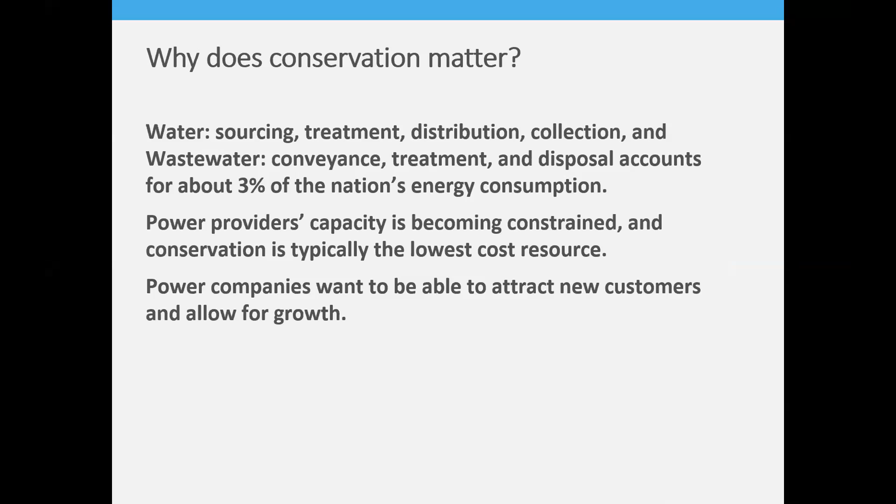Why should we care about conservation? Well, water sourcing, treatment, distribution, collection, and wastewater conveyance, treatment, and disposal accounts for about 3% of our nation's energy consumption. We've got power providers where their capacity is becoming constrained, and conservation is typically the lowest cost resource. And then power companies also want to be able to attract new customers and allow for growth.

So nationally, the energy used by municipal water and wastewater treatment plants typically accounts for 35% of a municipality's energy budget. So it's a significant cost. And wastewater treatment plants generally are large energy consumers with pumps and motors and equipment that's running all the time.

So just to give you a sense of scale, if you've got a 10 horsepower motor that's running all year, all the time, it's going to use 65,000 kilowatt hours in a year. If it's a 2 horsepower motor, it's going to use 13,000 kilowatt hours a year. If you've got a 5 kilowatt space heater and that's running 10 hours a day, 5 days a week, it's going to use about 11,000 kilowatt hours, which is very similar to that 2 horsepower pump. A 60 watt light bulb is going to use 526 kilowatt hours a year.

So why should you care? Well, regionally, electric rates are heading up, and the electrical costs associated with pumping and treatment are often the highest non-labor cost for a municipality. And it's one of the few costs that can actually be reduced without impacting water quality. So if we just look at pumps, the operation and maintenance cost over the lifetime is actually 70 to 80%. So only 20 to 30% of that cost is capital.

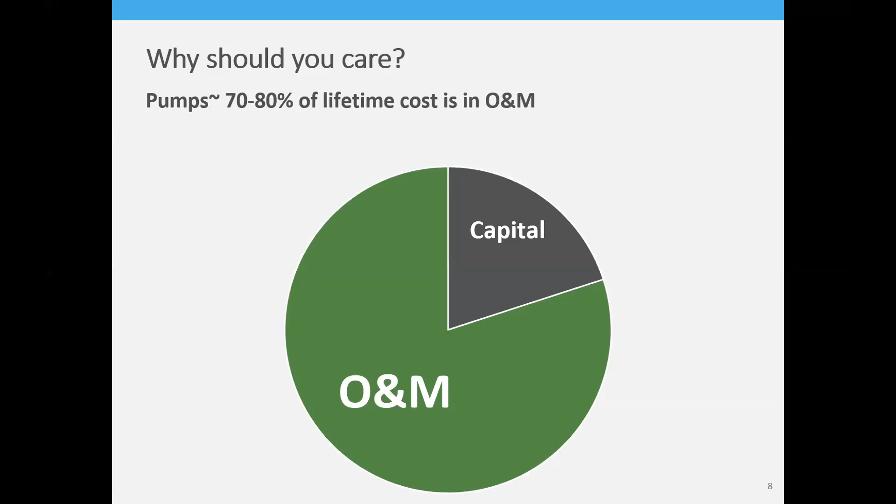And now premium efficient motors are the minimum standard for new equipment in the US. But for some cases, there's also super premium motors that have even higher efficiency. And if you choose to use those, there could be an incentive for that. And the lifetime cost of most equipment is incredibly dependent on its efficiency. So efficiency is really important to consider.

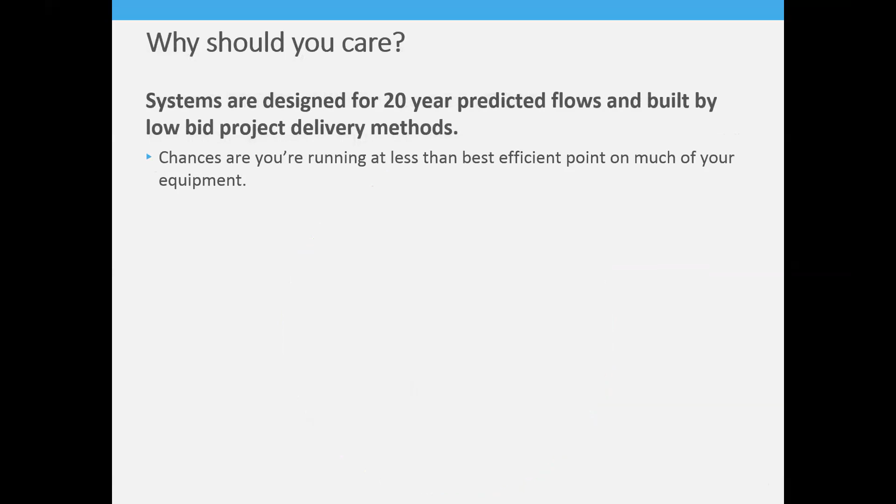So typically systems are designed for 20 years predicted flows and then built with low bid project delivery methods. So the chances are you're running at less than your best efficiency point on most of your equipment. And so sometimes that means your equipment's working harder than it needs to. And now SRF grants and loans have green requirements, so energy projects can qualify.

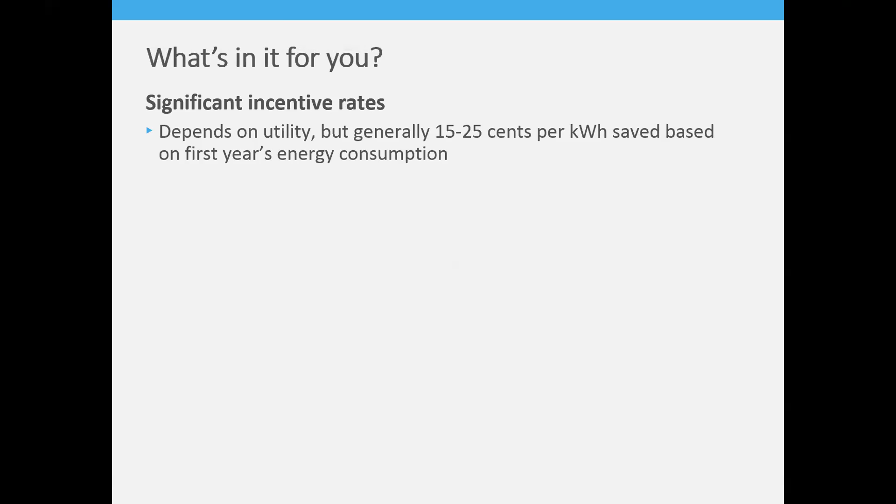What's in it for you is a significant incentive rate. So depending on your utility, it can be anywhere from 15 to 25 cents per kilowatt hour saved based on your first year's energy consumption and savings. So if you have an aeration system and you can go from 25 horsepower down to 15 horsepower, you could be looking at $12,000 to $16,000.

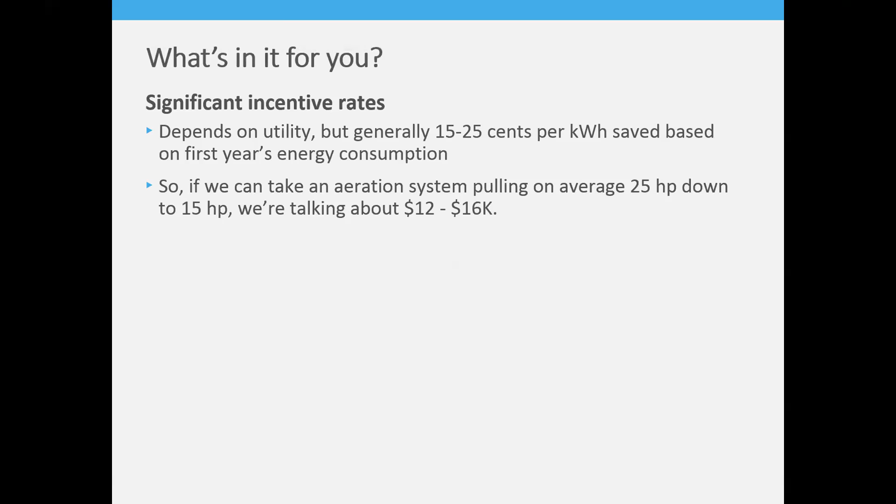And there's normally a lot of free assistance in identifying potential projects, shepherding the projects through the system, and performing measurement and verification on what you installed. And then you're going to get that ongoing energy savings for the life of your equipment. And sometimes you get reduced maintenance costs because you're turning off equipment or turning it down. And then sometimes there's aesthetic and comfort improvements. So better lighting might be more safe, better HVAC, more comfortable.

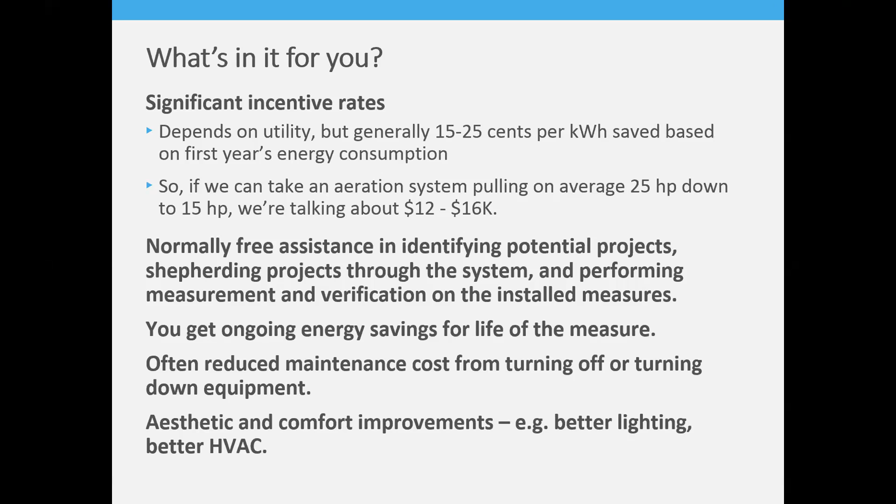You may be thinking, who do I call? Well, this is a view of utilities in the Bonneville Power Administration service territory. Bonneville Power Administration is a federal power marketing agency. They're under the Department of Energy, and they've been around since 1937. Their service area covers Idaho, Oregon, Washington, Western Montana, and then portions of California, Nevada, Utah, and Wyoming.

And BPA has the Energy Smart Industrial Program, which helps their customers and their industrial end users achieve cost-effective energy savings. They have technical expertise and a lot of resources. And then there's Energy Trust of Oregon, which is based in the Portland area, and they help customers in Oregon. Energy Trust, BPA, Idaho Power, Rocky Mountain Power, Avista, any of those providers has very similar programs and incentives.

So I'm going to kind of focus on explaining BPA and then give a little bit of information about the other providers, but they do have similar programs. So Energy Trust of Oregon serves customers of Portland General Electric, Pacific Power, Northwest Natural, and Cascade Natural Gas.

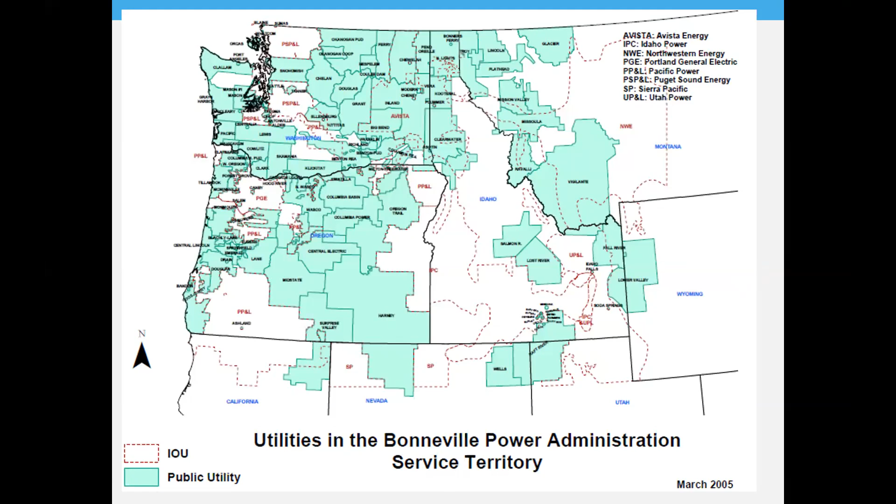But Energy Smart Industrial Program components have an Energy Smart Industrial Partner, that's the face of the program. And what we're really here to talk about today is the custom projects. That's your traditional capital projects. So we're looking for incentives for pumps, fans, compressed air, motors, variable frequency drives, control upgrades, and process upgrades.

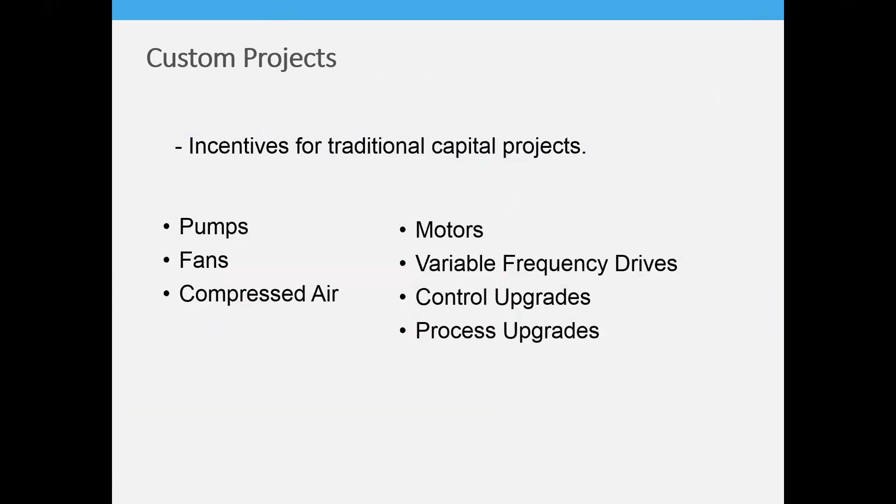As I mentioned, the incentives typically vary from 15 cents to 25 cents per kilowatt hour. And then there's also a cap at 50, depending on who you're served by, 50 to 70% of the project cost. So you're going to get the lesser of either the rate-based incentive or the 50 to 70% of the project cost. The project cost can include design fees, and it can be the incremental cost between baseline and the efficient equipment for new construction.

So let's say you're putting in new aeration basins. It's not going to be the cost of the concrete and every cost associated with all the new basins. If you're putting in turbo blowers, but you could have put in centrifugal blowers that were much less efficient and you're using DO control, the cost difference is going to be the turbo blower cost minus the centrifugal blower cost.

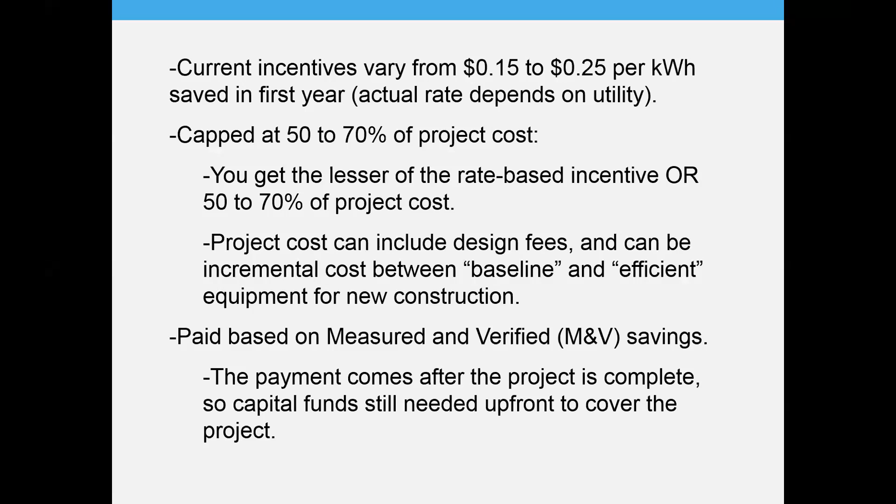And then it's paid based on the M&V savings, so you do have to pay up front. The payment's going to come after your project's complete and the savings have been verified. So you still need your capital funds up front.

So just to estimate payback, because the utilities are also going to look at payback when they do the incentives. If it's got a 50-year payback, that's not going to be considered cost effective from the power provider's perspective. So let's say you're going to have savings of 100,000 kilowatt hours, and for your provider, let's say you're charged 5 cents a kilowatt hour. So that savings, you're going to save $5,000 a year from that project. And let's say your project costs $50,000. Well, then that's a 10-year payback, 50,000 divided by 5,000.

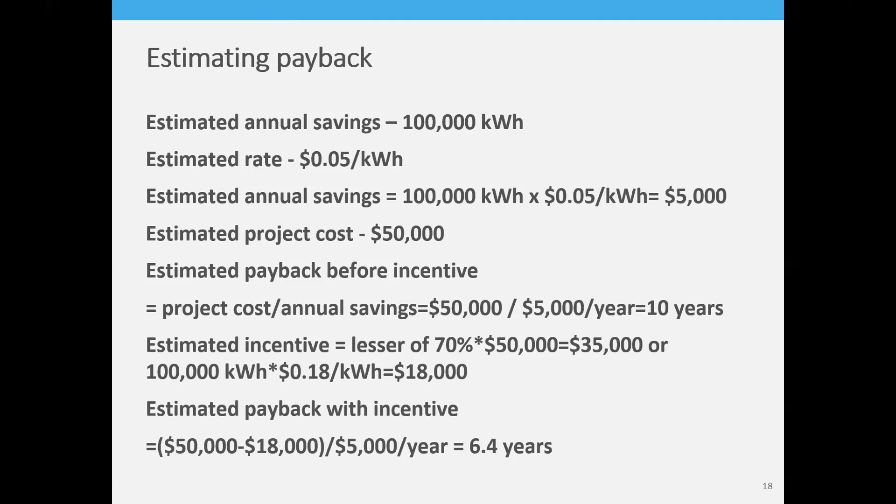So let's say that you're in Idaho Power's area and you're going to get 70% of project cost or 18 cents per kilowatt hour, whichever's less. At 70%, that would be $35,000 incentive, but you're only saving 100,000 kilowatt hours, which is $18,000. So you're going to get an $18,000 incentive. So your cost is going to be 50,000 minus 18,000 divided by the $5,000 a year. So you're going to go from a 10-year payback without your incentive down to a 6.4 year payback with the incentive you're going to get.

Another program component is small industrial, and it's kind of trade ally driven. Small industrial means small industrial projects, not that your facility is small, just that the particular project you're doing is smaller. An example would be a small 75 horsepower or less compressed air system.

This uses simplified analysis tools, and there's a rapid review and approval process, using vendors to help bring in projects. The incentive rate is the same as the custom projects incentive. There's not really M&V, just making sure that the controls are tuned to what they were for the calculations and that the equipment was installed.

So ESI has a small industrial program. Other programs have similar components that are just called something different, maybe streamlined industrial. Things are called different things depending on who provides your power, but you're going to find similar programs.

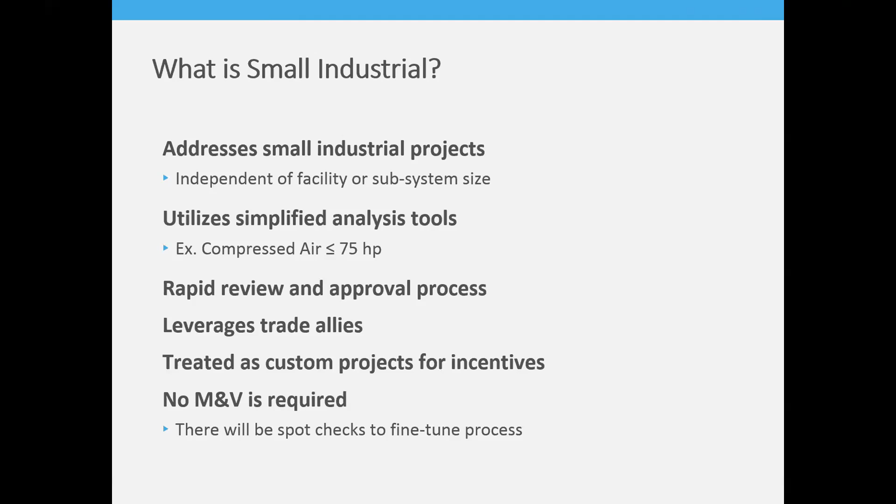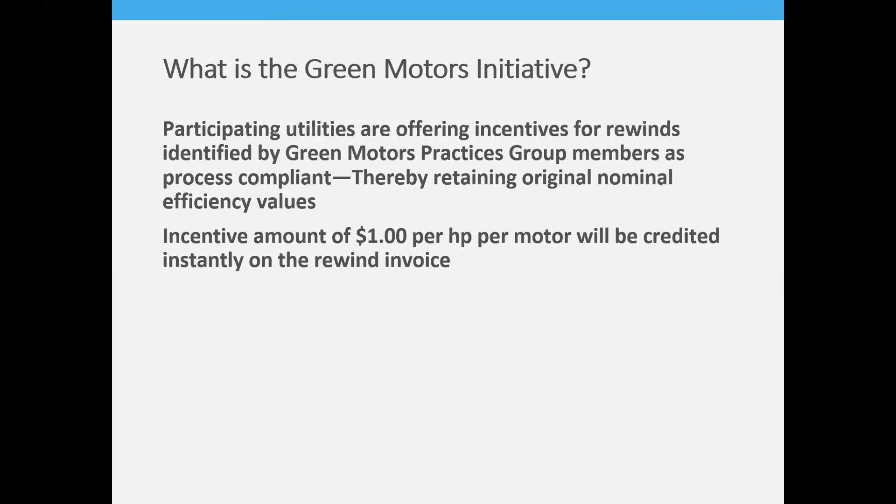I just wanted to mention the Green Motors initiative that the utilities participate in. Basically, if you take your motor to be rewound, and they do the green motors process, it's going to retain the original nominal efficiency value. The incentive's $1 per horsepower, and that's going to be credited on your invoice. Greenmotors.org has the shops, and you can save up to 40% or more of the cost of buying a new motor, while knowing that you're getting that same efficiency it originally had.

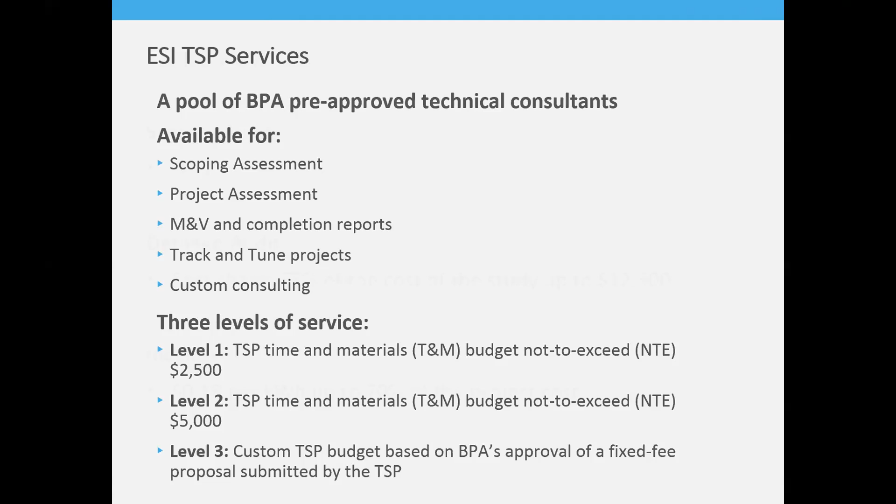So the ESI program has technical service proposal consultants, a pool of BPA pre-approved technical consultants that can help you with scoping assessments, project assessments, M&V and completion reports, track and tune projects, and custom consulting. Three levels of service are: level 1 would be time and materials up to $2,500, level 2 up to $5,000, and level 3 is custom based on an approved proposal.

To compare that to Idaho Power, they have scoping audits with pre-approved companies that can do that. Cascade Energy is one of those. That's free to the customers up to a $3,500 value. That would help you identify a project if you don't really have anything in mind, or if you do have something in mind and just need help coming up with your energy savings.

Idaho Power will also do a cost share for a detailed audit, which is a deeper dive that really digs into a project and comes up with all the estimated energy savings for different equipment going in. You as a customer would pay for that, and then Idaho Power would reimburse you up to 75% of the cost of the study, up to $12,500. Their incentive is 18 cents per kilowatt hour, up to 70% of the project cost.

Energy Trust of Oregon does scoping studies for free for their customers, conducted by program delivery contractors. So your facility has a program delivery contractor if you're served by Energy Trust of Oregon for your energy efficiency. They also do technical energy studies for free, and their incentive is 25 cents per kilowatt hour, up to 50% of project cost. Rocky Mountain Power is 15 cents per kilowatt hour, up to 70% of project costs.

Looking at retrofit opportunities, sometimes they can be a challenge because of that design for 20 years of growth, the difference between capital costs and O&M costs, and sometimes there can be regulatory challenges because you really need to meet your permit, with little to no tolerance for errors if you're experimenting.

Energy costs are typically considered fixed with a slight adjustment each year for inflation, and we have relatively low power costs, some of the lowest costs in the nation. Really the goal is to produce clean water that's meeting permit.

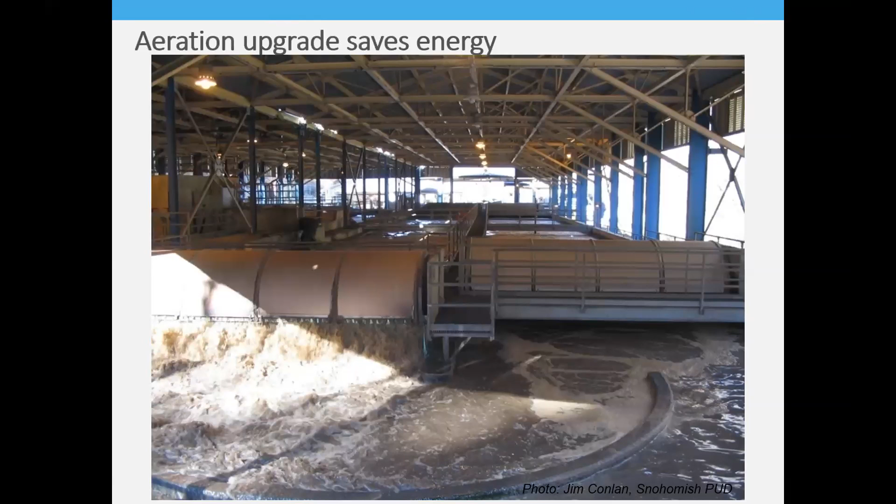So here's an example in the Pacific Northwest. This was an aeration upgrade. This facility has an oxidation ditch, and they were running two 40 horsepower brush rotors in one ditch and four 30 horsepower brush rotors in the other. They took those out and replaced them with fine bubble aeration with DO control and two 50 horsepower turbo blowers. The turbo blowers are high efficiency and quiet.

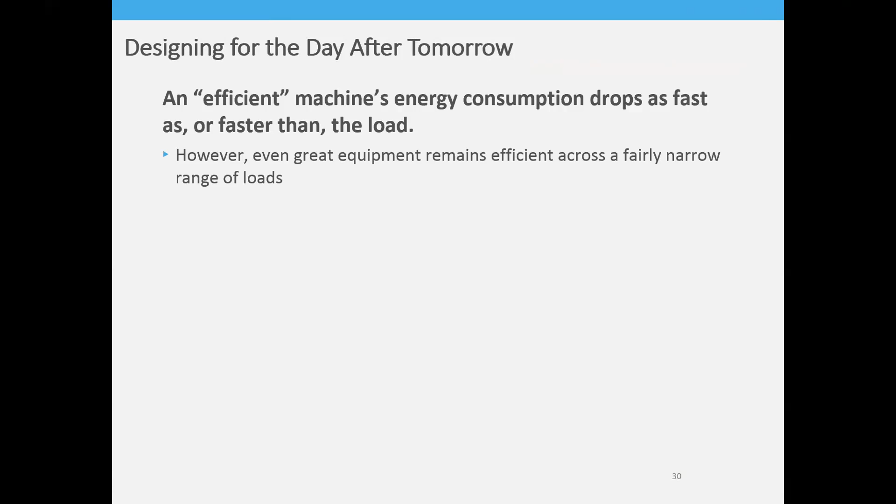So when we talk about designing for 20 years from now, or also the day after tomorrow, that's a key takeaway. An efficient machine's energy consumption should drop as fast as or faster than the load, but great equipment is not going to be efficient at any operating point. It's going to be efficient across a fairly narrow range of loads. So an efficient system needs to encompass enough individual parallel machines to cover the entire range of loads expected over the course of its lifetime.

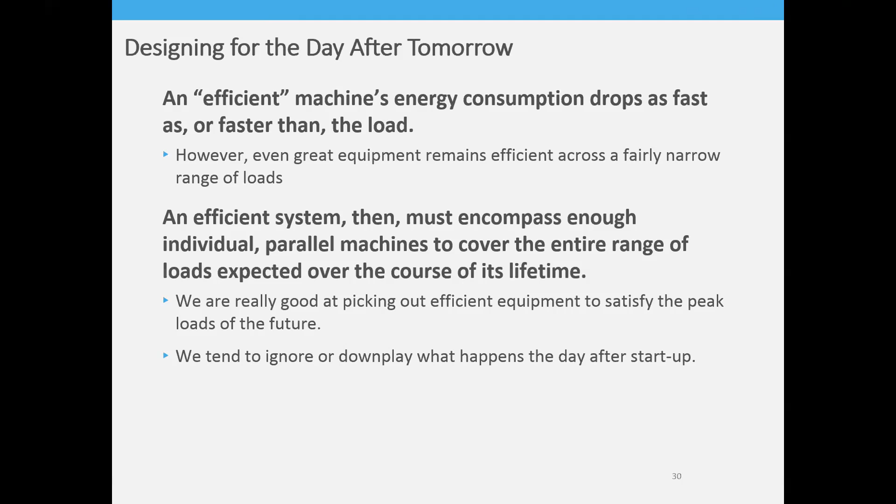We tend to be really good at picking out equipment that's going to be efficient at the peak load of the future, but we can ignore or downplay what happens the day after startup. So hopefully we'll think about turn down and efficient equipment at all operating points if possible.

In this example, they installed 3 75 horsepower turbo blowers, and the goal DO was 2 milligrams per liter, but with 2 blowers off and 1 turned as far down as it could go, they were still averaging 8. The solution for this is they pulled out a 75 horsepower blower and put in a 30 horsepower blower so that they could get the airflow they needed to meet the DO they were looking for.

This is a common inefficiency we see in new infrastructure. It's due partly to the requirement to design for future flow and loads, as well as the stacking up of safety factors and worst case scenarios, like the hottest day of the year, foul diffusers, worn blowers, and a maximum month load. So there's a lot of reasons it happens, but if it's a new facility and there's room, it's a great time to try to put in equipment that can turn down even farther.

So let's assume there's a peak demand for a different system of 800 gallons per minute in the future. The lowest cost alternative while ensuring redundancy would be to install 2 800 gallon per minute pumps. But we recognize that you're not going to get 8-to-1 turn down.

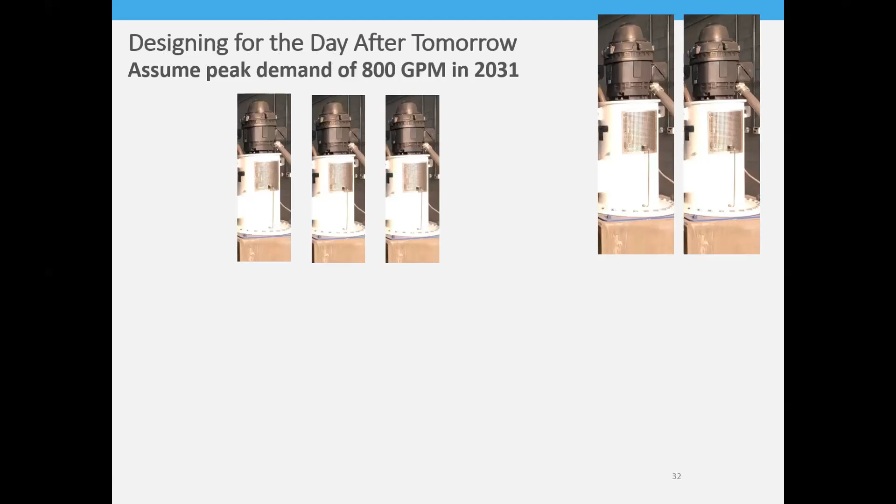So often the next selected choice is 3 400 gallon per minute pumps. But if we looked at that 800 gallon per minute peak, it might only be needed 1/1000th of the life of the equipment. So an alternative would be to put in 5 200 gallon per minute pumps.

And this is where the incentive program can come in to try to help cover the cost of installing additional equipment that's going to allow the system to operate more efficiently. Another option would be to install 4 300 gallon per minute pumps and 1 100 gallon per minute pump.

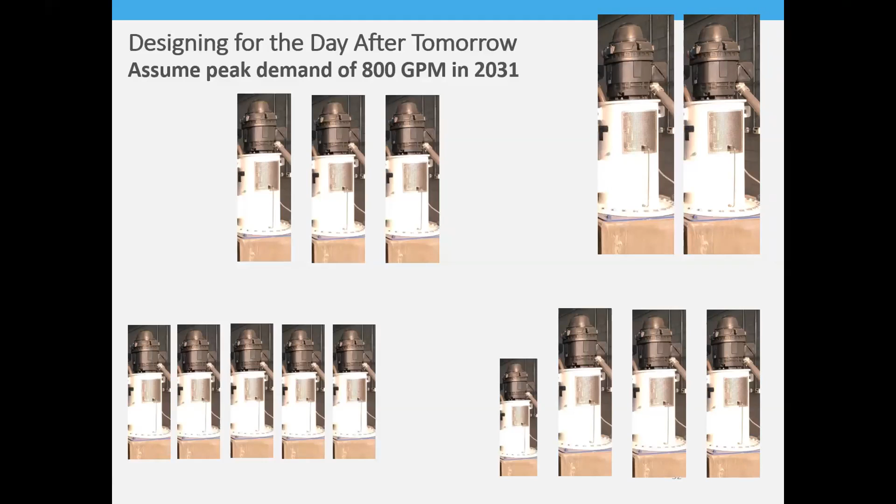For this incentive, they could have put in the pumps and throttled them, or they installed VFDs. The estimated savings was 270,000 kilowatt hours a year, which is just over $13,000 a year in energy savings. The incentive would be capped on savings, and it could be about $48,000. So it's about a 10.7 year payback before incentive and a 7-year payback with the incentive.

So how do we match flow to load? Well, we could pick a new pump, we could trim an impeller, we could find additional uses for the water we're pumping. We could recycle flow, or the most common approach is to burn off head by throttling.

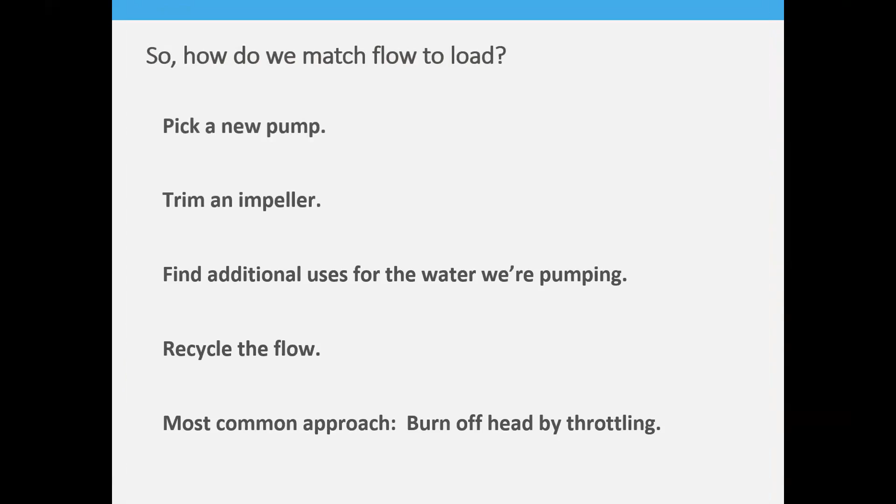And the reason is that it just uses more energy. So if we look at our design point and we're looking for 900 gallons per minute, then we're going to be operating about 85% efficiency and 575 feet of head. But then if we only want 700 gallons per minute and we throttle that, it's going to increase our head by about 100 up to 676 feet, and it's going to decrease our efficiency down to 80%.

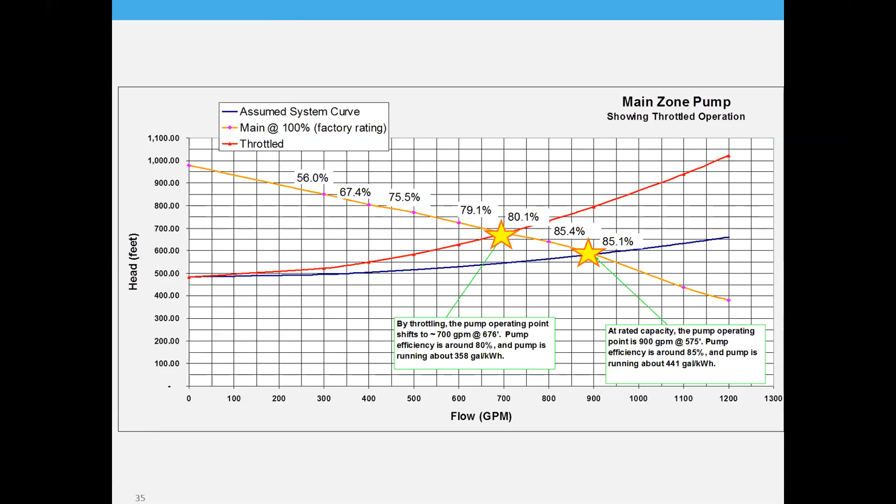So instead, if we used a VFD, we'd still have our initial operating point, and then if we wanted 700 gallons per minute, we would reduce the speed down to 91%, and the head actually drops by about 30 feet, and the efficiency does drop as well. It goes from about 85% down to 83%, but we're going to get a little more gallons per kilowatt hour, so it's actually more efficient.

The VFD is limited in its turn down even in this case. At 75% speed, it would be way over on the left of the curve. So a VFD can't solve everything and doesn't necessarily turn down all the way.

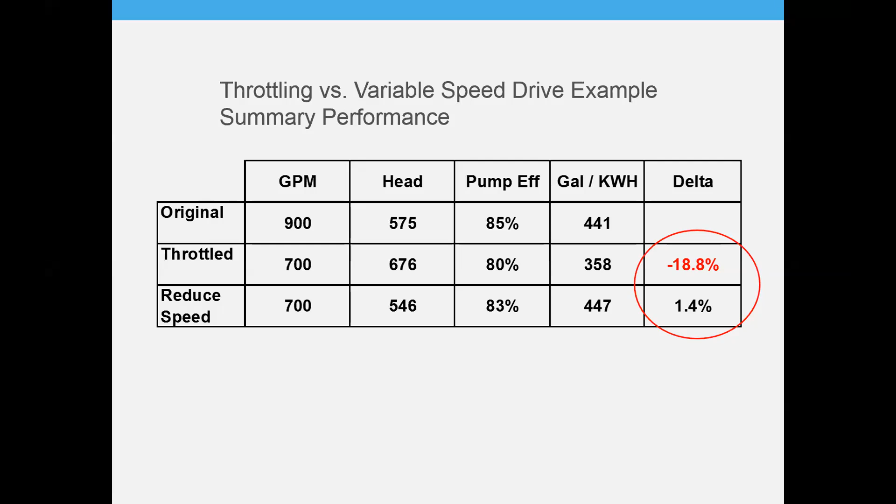That's why it's better to put in additional equipment, like a jockey pump if you can, when you have those really low flows. But in this case, wanting 700 gallons per minute instead of 900, going from throttling to a reduced speed would save about 20% by putting on a VFD instead of throttling.

Another example: for this baseline scenario, there are 2 biotowers, and the baseline case is to use constant speed pumps and let the recycle ratio fluctuate with influent flow. So during the initial years, the recycle ratio would be higher, and then over the years, the recycle flow would be reduced toward the minimum design.

So in this case, it would be operating at 5,200 gallons per minute and 34 feet of head. And then for energy, we use the brake horsepower equation. We get 120 brake horsepower and then 825,000 kilowatt hours per year.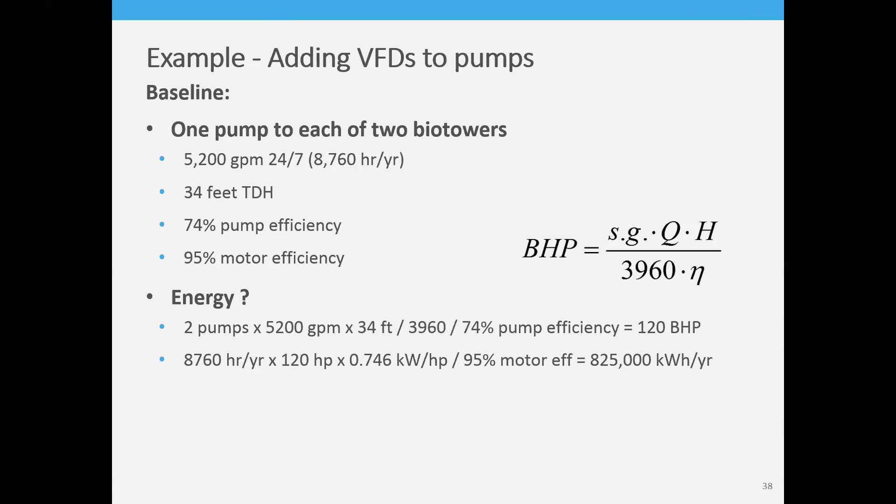So if we're looking at VFDs instead, with the VFD and a more sophisticated system, the flow rate can be adjusted down to achieve our desired design recycle ratio. In this case, we're only going to have 3,770 gallons per minute per tower. Our head is going to be lower because of lower flow, so lower head loss. And then, assuming the pump efficiency and motor efficiency were the same, it goes from 120 brake horsepower down to 72, and from 825,000 kilowatt hours per year down to 511.

Don't forget that the VFD also costs you 3% efficiency. So this is another point: if you have a pump designed at your best efficiency point and you're just going to constantly operate at that best point, you don't want a VFD on that, because it's going to use more energy than if you didn't have a VFD. VFDs are normally great options to save energy, but there are cases where a VFD is not going to save you energy.

But in this case, they would save $15,700 a year, and an incentive of up to $57,500 to help with the VFD system.

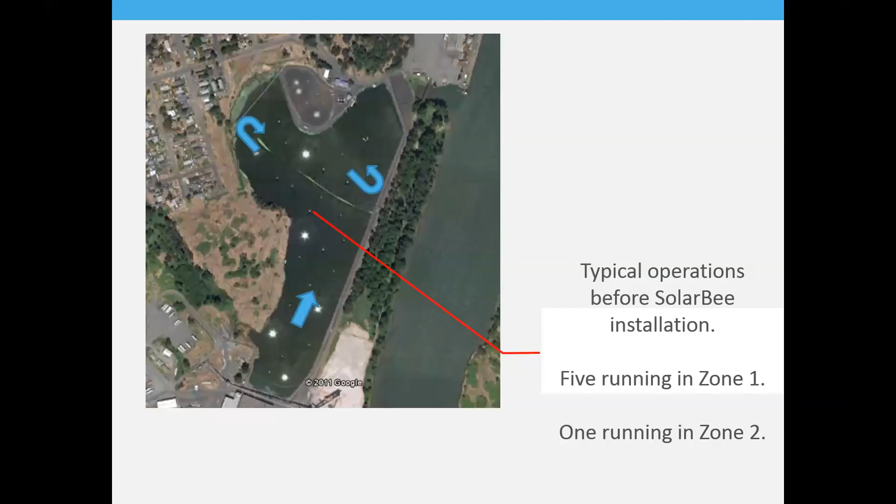This is an example of a facility that has a lagoon with surface aerators. They don't need as much aeration, but they need more mixing. So they were running 6 surface aerators. They had more installed, but still wanted more mixing, so they're replacing their excess aeration with more effective circulation.

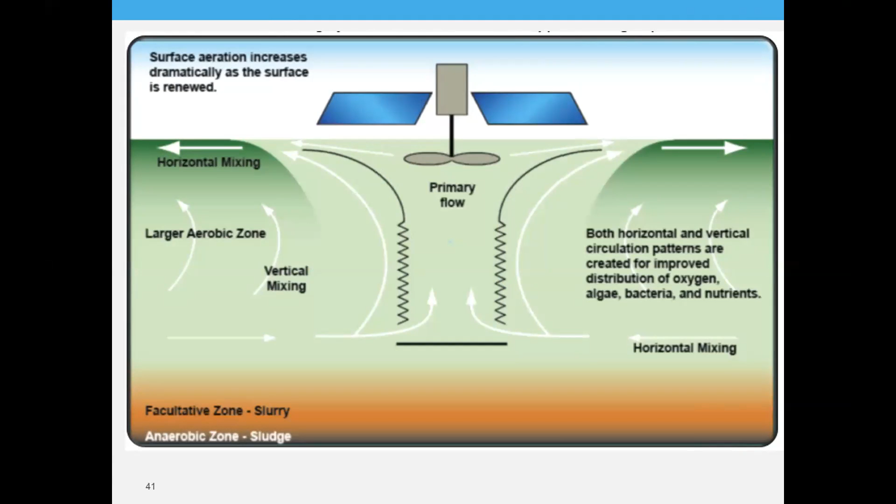So they're installing SolarBees, connected to power on the shore, because just based on weather alone you're going to want them connected to grid power as well. Here's a picture of the installed circulator. They installed 7 of them, and these actually use less than 1/10 horsepower each, so even with 7, it added up to less than 1 horsepower.

And they were able to eliminate 253 horsepower of aeration. Their savings was 1.8 million kilowatt hours per year. They saw no degradation in effluent quality and no discernible increase in odors.

The total cost of the project was $375,000. They got an incentive of about $262,000. Their simple payback without the incentive was 5.2 years, but with the incentive that brought the payback down to 1.6 years.

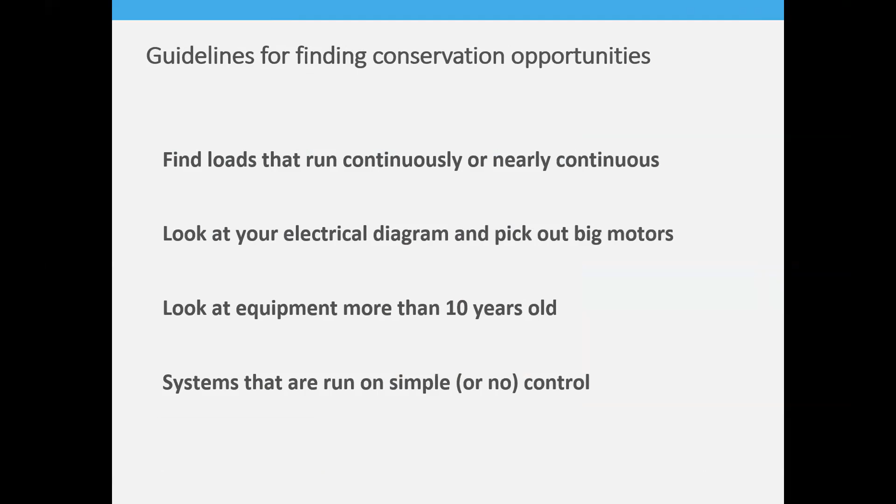Some guidelines for finding conservation opportunities: look for loads that run continuously or nearly continuously. Look at your electrical diagram, and you can pick out the big motors to focus on. Look at equipment that's more than 10 years old. If you have systems run on simple or no control, those are great potential opportunities, especially if you have an aeration system with simple DO control. There's probably a lot of opportunity there.

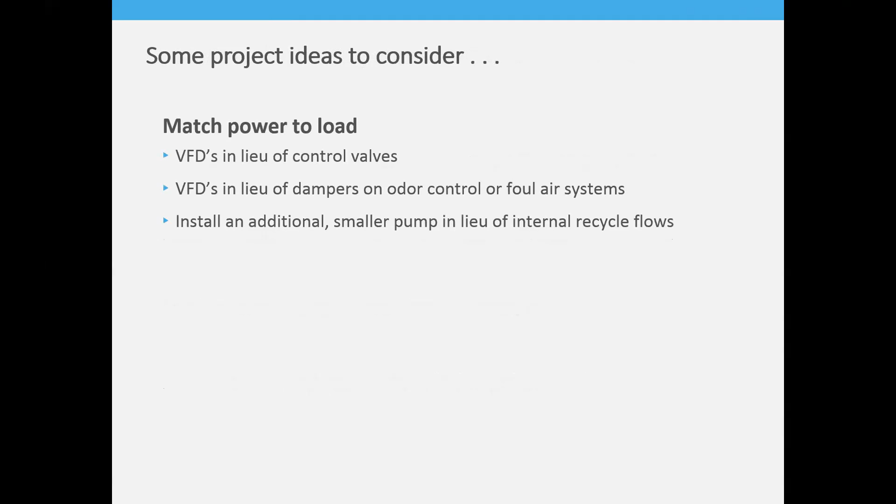Consider VFDs instead of control valves. Consider VFDs instead of dampers on your odor control. Look at installing additional smaller pumps and using efficient equipment. You could swap out your motors, use the green motor programs if you're rewinding, check that your pump impellers are correct for your actual conditions, and use your most efficient equipment first and most often.

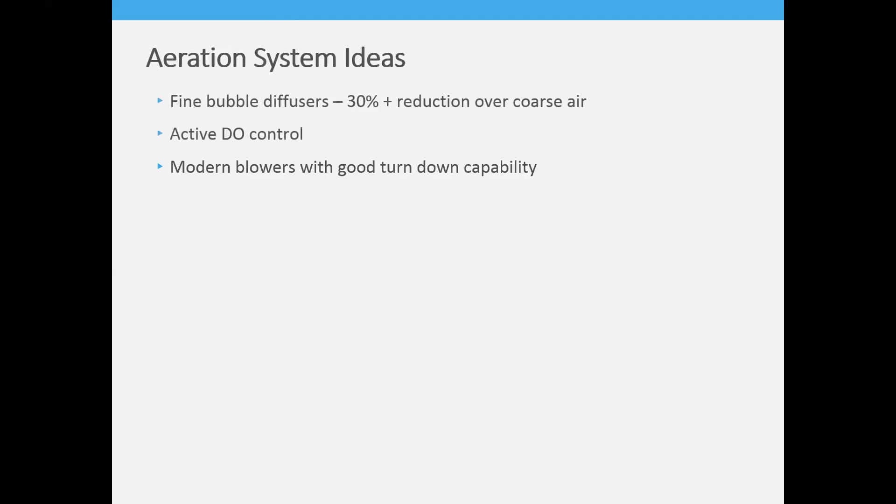Some aeration system ideas: usually going from coarse to fine bubble saves 30% energy. Active DO control saves energy. Blowers with good turndown capability. Using a least-open valve cascaded control strategy. If you're nitrifying, do you need to? Could you denitrify and get the oxygen back? Could you improve your primary clarifier performance and reduce your BOD load to your secondary? You can investigate alternative aeration options, and new surface aerators are more efficient at transferring oxygen into water.

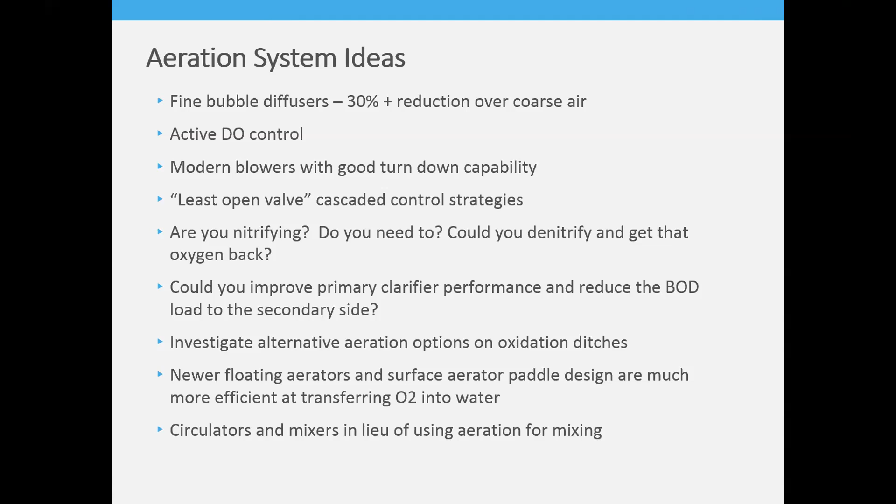So in summary, the incentive is basically around $1,600 per horsepower saved on motors that run all the time. 50 to 70% of the cost can be covered. No project is too big or too small, and the incentives can work with other funding sources. There's typically no cost associated with it, and the paperwork is minimal compared to typical infrastructure funding.

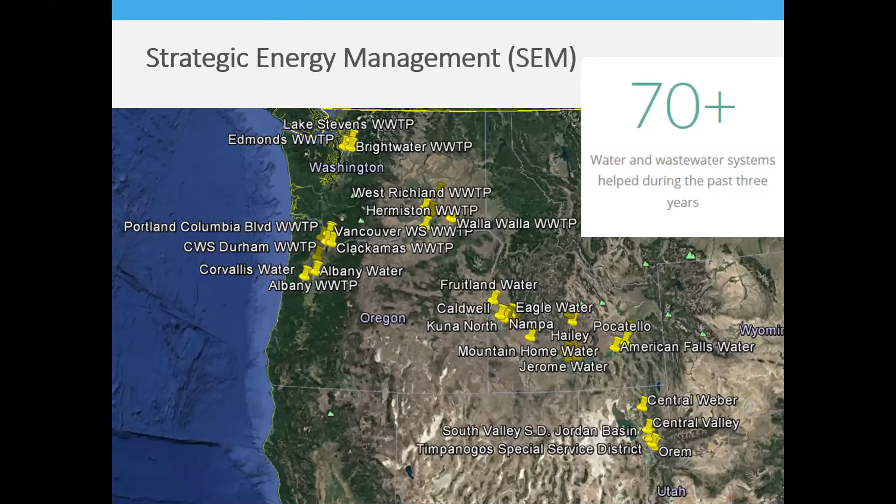I briefly wanted to mention strategic energy management. It's basically helping facilities with low and no cost opportunities for savings. Cascade has worked with over 70 sites in the last 3 years, and they've achieved an average of 9% savings with these low and no cost energy opportunities.

And I really like this quote from Mick with the city of Ketchum. He said, 'The level of treatment wasn't affected, but we reduced our energy consumption for that process by about 15%.' I think that's great because it speaks to saving energy but not sacrificing water quality. Whether it's a capital project or an O&M or low-cost project, that's really critical and key, that we're not sacrificing water quality. We're helping the system operate more efficiently and still achieve the water quality.

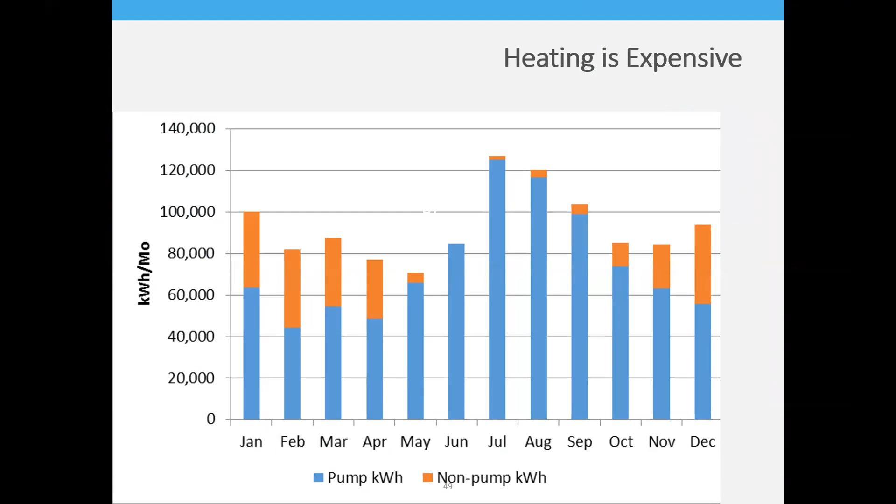I'm running short on time, but just one example of an O&M type thing is heating. If you've got uncontrolled heating, it can be expensive. This facility just had their heat on, and in the winter you can see a lot of orange, because they were spending a lot of money on heating versus pumping costs. Over a 3-month period over the winter, they spent $17,000 on that facility, but $7,000 out of $17,000 wasn't even for pumping, it was just for heating.

So they were able to save money just by setting a thermostat where, not for human comfort, but just to prevent freezing. If people aren't going to be in a facility, then there's no need to heat it for human occupancy, and same for air conditioning.

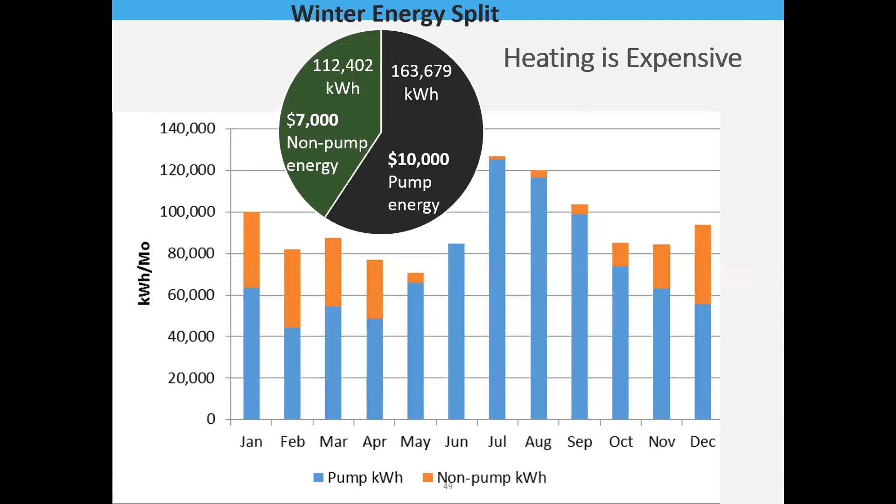So the big O&M opportunities are typically with reducing operating pressures and flows of plant fluid and air systems, like compressed air and plant water. If you've got a 100 PSI air system and you reduce it by 2 PSI, you can typically save 1% in energy of that system.

Reclaimed water isn't free because you're treating your water through your plant and then pumping it around for plant water. One facility reduced their water pressure from 106 to 60, and also reduced it where they didn't need to use it, and they were able to save $6,000 a year just on plant water.

Control set points can be big savings. Typically, on average, if you reduce DO by 0.5 milligrams per liter, you can save 6 to 7% of your aeration energy. 2 milligrams per liter is typical, but some systems are able to run lower than that.

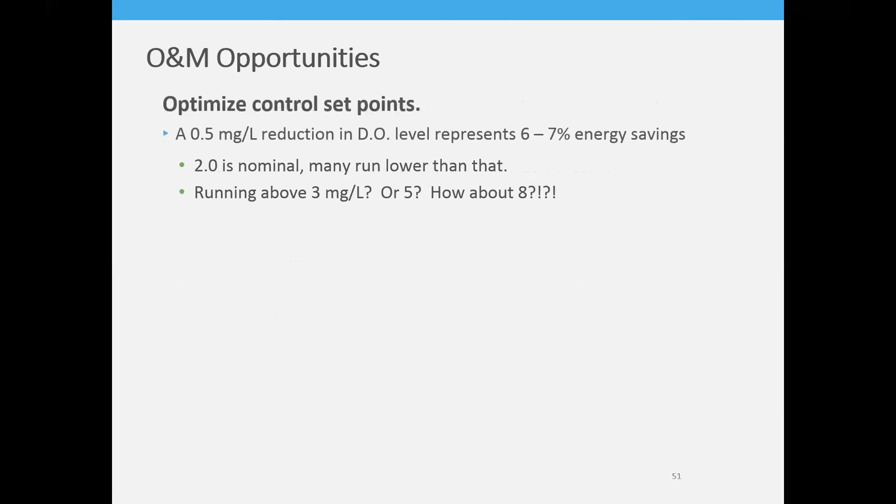We always encourage this as baby steps. Don't just reduce it by a lot. Do incremental small changes and see if it works. And when you hit a point where it's not working, stop and go back to where it was working. But if you're running really high, there's probably a lot of potential for savings.

Lift stations: if you increase the wet well level, you can save energy. Typically, if you had a pump with 20 feet of head at normal operating point, and you raised it by 6 inches, you could save 2.5% energy on that.

So how do you get started? Well, you can call or email me and I can help you, or direct you to someone who can help you, or you can call your utility and let them know that you are interested.

And now I think if there's time, we can take questions. All right, thank you, Wendy. It's a great presentation with a lot of useful information.

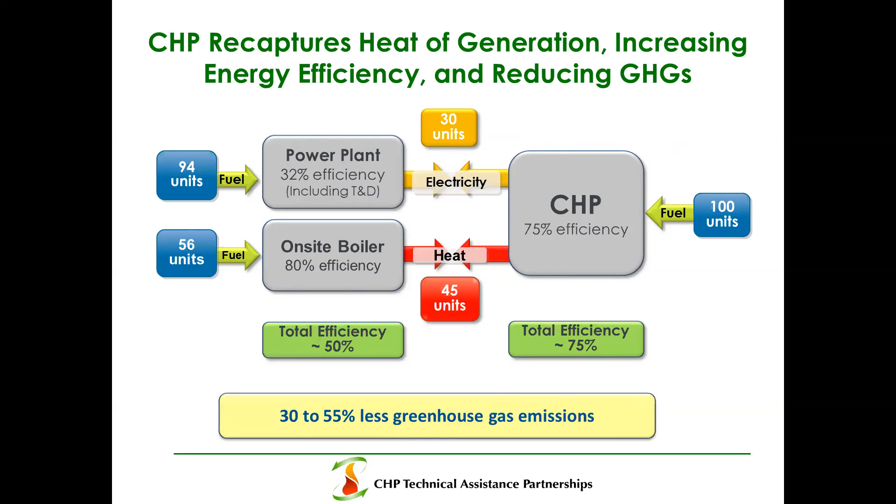An on-site boiler might be 80 to 84% efficient in terms of producing heat, but the total efficiency, if you purchase separately, is around 50%. Your CHP project can be up to 75 to 80% efficient. And of great interest now is greenhouse gas emissions. You have the potential, based upon your generating mix, to reduce greenhouse gas emissions by 30 to even as much as 55%.

So how does a CHP project work? You take a fuel type, and it can be gaseous, solid, renewable, or even waste products. You put it through a prime mover, which can be a reciprocating engine, combustion turbine or gas turbine, a microturbine, steam turbine or fuel cell. The prime mover turns a generator to produce electricity, either for on-site consumption or to sell to the utility.

The exhaust gases or waste heat from the prime mover go into a heat exchanger to produce useful and usable thermal energy in the form of steam, hot water used for either space or process heating. Also, process cooling is a potential if you want to consider absorption chillers.

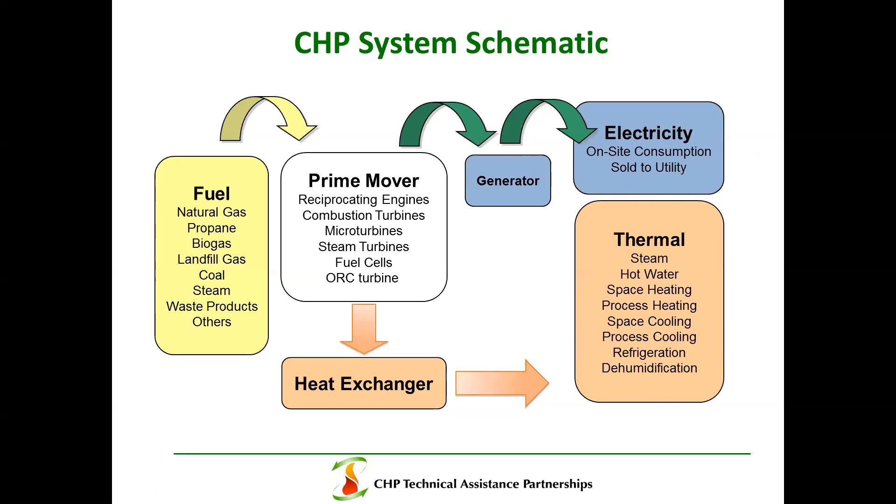So what are the benefits of CHP? It's more efficient, and that translates into lower operating costs, but does require, of course, an upfront or capital investment. It results in reduced emissions, not only of greenhouse gases, but also of priority pollutants. You can increase energy reliability and what we call resiliency.

And lastly, on-site generation can reduce grid congestion and also avoid transmission and distribution losses, which might be as much as 3 to 7% of the energy used on site. The different prime movers generally come in different cost-effective size ranges. Typically at wastewater treatment plants, you're going to see the use of lean or rich burn reciprocating engines, perhaps microturbines, although I'll talk to you later about gas treatment requirements.

Down in California, they've had some fuel cell applications, but I want to point out these are generally what they call virtual applications, where the biogas would be treated or conditioned at the treatment plant, injected into a pipeline, and then a CHP project miles away at a site in need of thermal energy would pull out pipeline gas, treat that gas, and then use it in the CHP project.

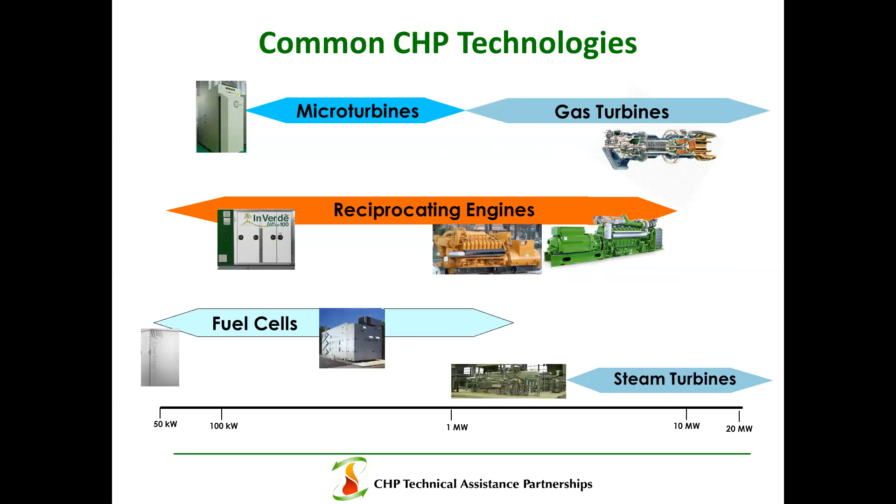Now, also greatly interested in CHP are hospitals, healthcare centers, nursing homes, and the driver for these end users is really resilience. You've all heard about Puerto Rico, the East Coast, where nursing homes lose power for a long duration outage. Their backup emergency generators might fail, and having a heavy-duty CHP project on site can literally be a lifesaver.

Other critical infrastructure sites include police, fire, and public safety related sites, centers of refuge. If you're going to send people to a conference center or school, it would be nice if that had the generation to be able to provide heating, hot water, and food services for the ones who are seeking shelter.

Military, they consider themselves as mission-critical facilities, and obviously they want reliability, redundancy in terms of types of fuel that can be combusted, as well as multiple sources of steam or electricity generation. So CHP can improve critical infrastructure resiliency, and it can be designed to continue to operate and provide an uninterruptible supply of electricity and/or heating and cooling.

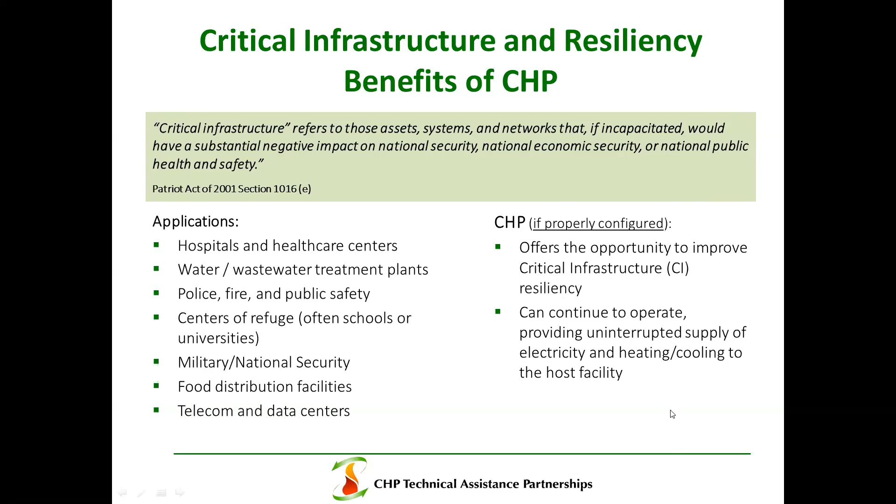So what about CHP deployments in the US? The first thing is CHP is not a new technology. It's actually a very old technology. Before there was a grid, CHP was the only way to get electricity and thermal energy available at industrial sites. In the US, there are 4,434 CHP projects in operation with a combined 81,300 megawatts of generating capacity.

Most of the generating capacity is in industry: in the chemical industry, petroleum refining, pulp and paper. More recently, we've been looking at smaller projects in commercial and institutional facilities. Part of the reason for that is you have the space heating and water heating loads that are coincident with electrical loads. And commercial facilities tend to also pay higher electrical rates than industrial facilities.

Here's a map showing the CHP projects in the US. I haven't counted the dots to verify that there are 4,400 of them, but you'll notice they're clustered in the areas of the country with high electrical rates.

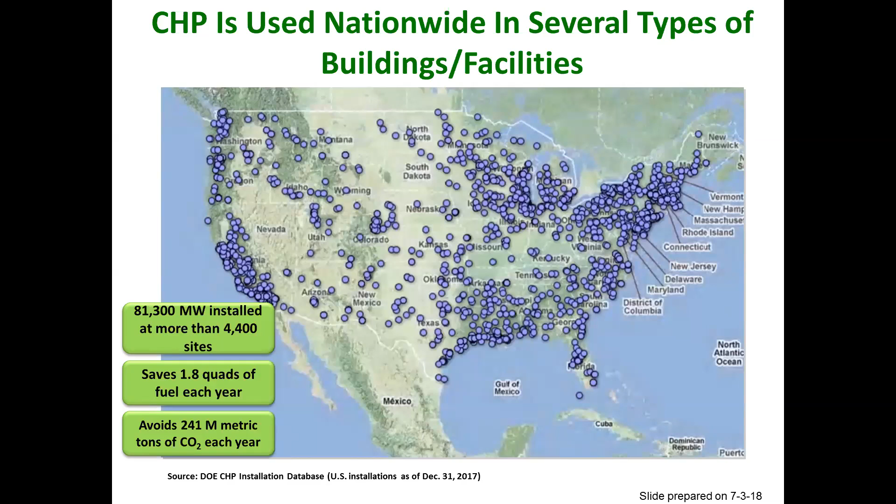Well, what about CHP and wastewater treatment plants? The drivers are energy cost savings. A lot of times end users are responding to federal, state, and local utility incentives, and a great example of local or state-specific incentives is the Energy Trust of Oregon. A lot of times local governments establish sustainability or greenhouse gas reduction goals, and CHP can help there.

CHP can provide public relations and green benefits, which is important to the political folks that are involved with local governments. You can have enhanced reliability, even though the treatment plants have emergency generators. A lot of times you can install the CHP during a regular facility upgrade, and sometimes avoid the need to replace equipment that's at the end of its life by substituting CHP to replace their functions.

There are ways of increasing biogas production at a wastewater treatment facility, which can increase CHP energy generation and make it more cost effective. A lot of times with the CHP project, you can have enhanced biosolids management, maybe produce co-products that can be distributed or sold as fertilizers.

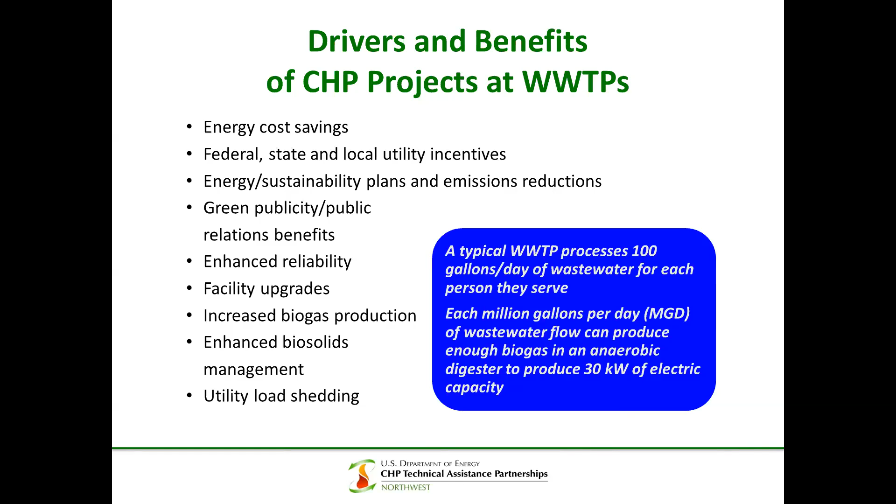Two rules of thumb: a typical wastewater treatment plant processes 100 gallons per day of wastewater for each person they serve. And of course, this does vary based on groundwater infiltration. The other rule of thumb is each 1,000,000 gallons per day of throughput is enough flow to produce enough biogas in an anaerobic digester to produce 30 kilowatts of electrical generating capacity. So if you have a 10 MGD treatment plant, do the math and you say, gee, it looks like a 300 kilowatt project might be appropriate at my site.

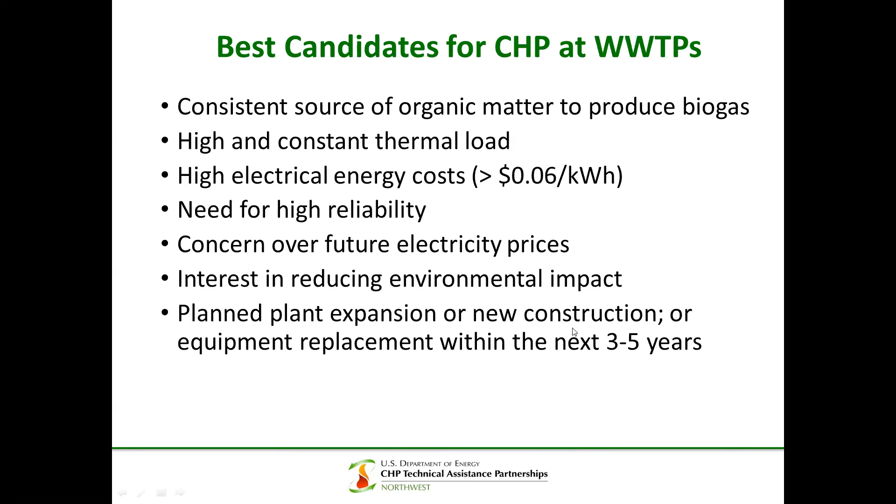Now, how many CHP projects are in operation at wastewater plants in the U.S.? Well, you have some CHP projects among the 222 that have very high capacity because they're using biogas as well as purchasing natural gas. And co-firing is always an option. We have 158 systems nationwide that have prime movers that are only fed with biogas. And those plants produce in the aggregate 323.7 megawatts.

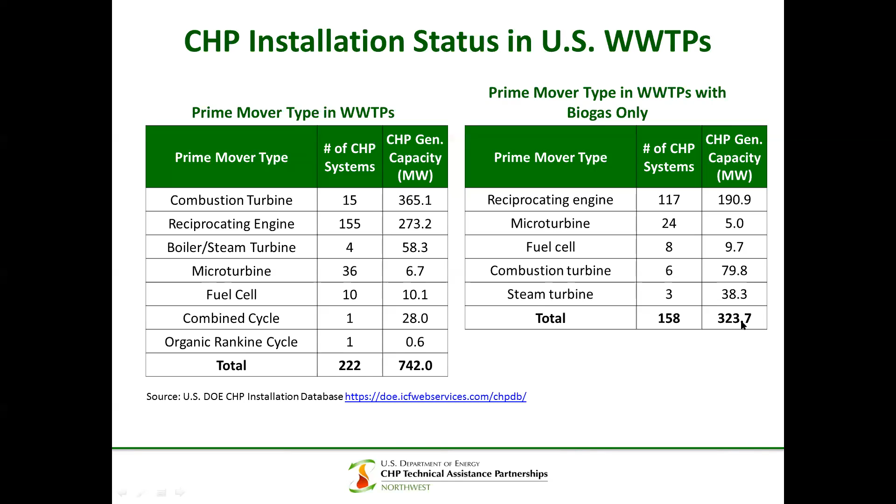Now, I mentioned biogas conditioning. What are we talking about here? Generally, we're talking about moisture, hydrogen sulfide, and siloxanes. Hydrogen sulfide is found in biogas produced from all wastewater treatment plant digesters. The concentration of hydrogen sulfide can vary tremendously. It can go from 200 to over 3,500 parts per million by volume.

H2S oxidizes into sulfur dioxide in the combustion process, forming sulfuric acid, which dissolves into water droplets that can condense out in your system. This can damage the prime mover, the exhaust systems, heat recovery devices, and stack liners. So hydrogen sulfide definitely has to be removed to prevent damage to your prime mover and affiliated equipment.

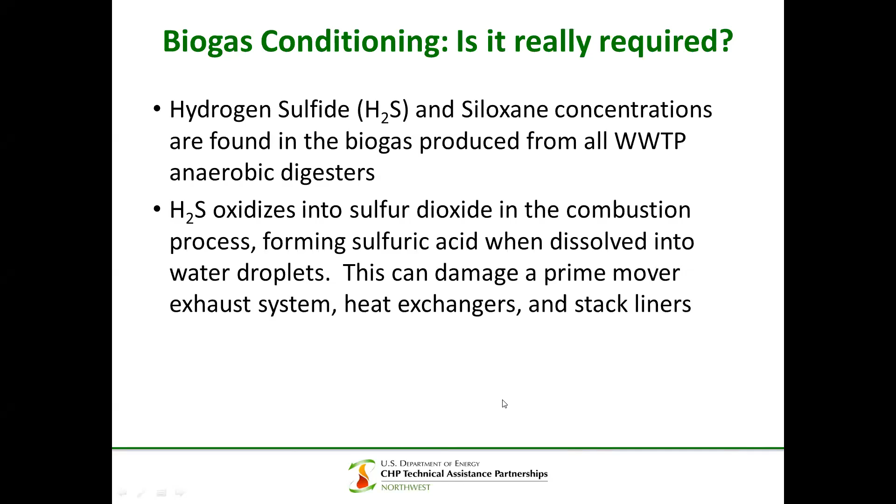Siloxanes are a family of organic silicon compounds that come from additives to personal care products such as shampoos and soaps. They tend to pass through the wastewater treatment plant process, accumulate in sludge, and volatilize to form a contaminant in biogas. When combusted, the siloxanes form a glass-like deposit that is harmful to reciprocating engines, gas turbines, microturbines, and fuel cells.

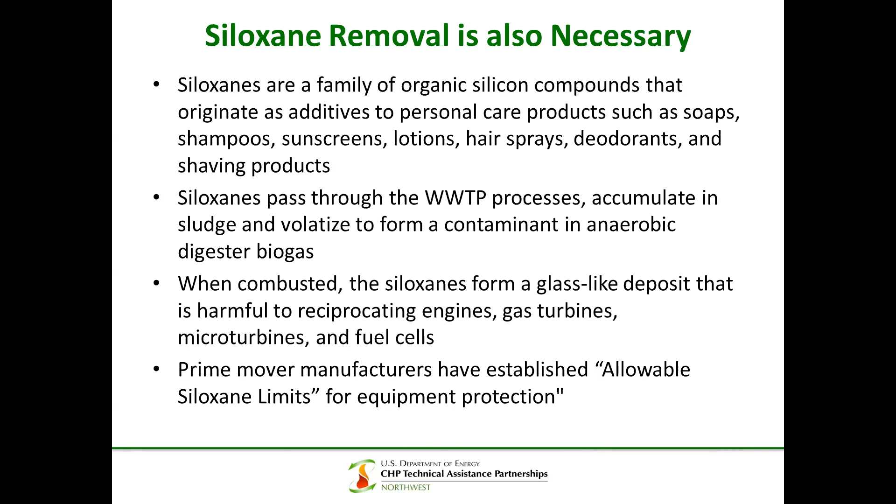And the different prime mover manufacturers have established allowable siloxane limits for their equipment protection. Now, I'll give you an example. The concentration of siloxanes also varies in biogas. It can vary from 2,000 up to 15,000 parts per billion. Hydrogen sulfide, 200 to 3,500. Microturbines, for example, Capstone microturbines, have established a siloxane limit of about 5 parts per billion by volume. So biogas treatment systems have to be custom designed based upon the biogas concentration of these harmful components and the allowable concentration limit or tolerance of the particular type of prime mover.

Siloxane deposits result in a decrease in project efficiency, an increase in heat rate, a reduction in power output, formation of hot spots, increased maintenance cost, and premature equipment failure.

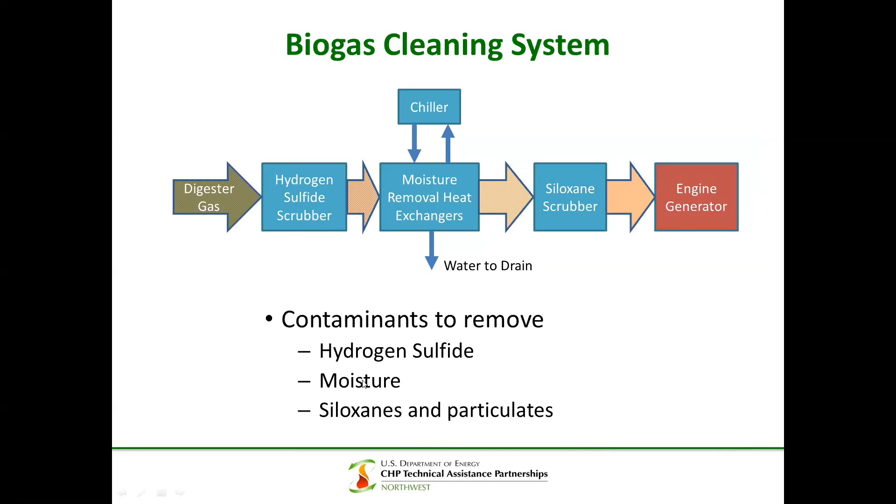A treatment train or process looks kind of like this. You extract the digester gas, it goes through a hydrogen sulfide scrubber. Then you remove moisture with a chiller. You generally would then go through a gas compressor through a siloxane scrubber system or activated carbon treatment tanks. And the compressor, by the way, would be sized to provide the engine generator with the clean biogas at the pressure needed for injection into the combustor. That would be about 75 psig for a microturbine, maybe 3 psig for an engine genset. So you're removing hydrogen sulfide, moisture, siloxanes, and any particulates.

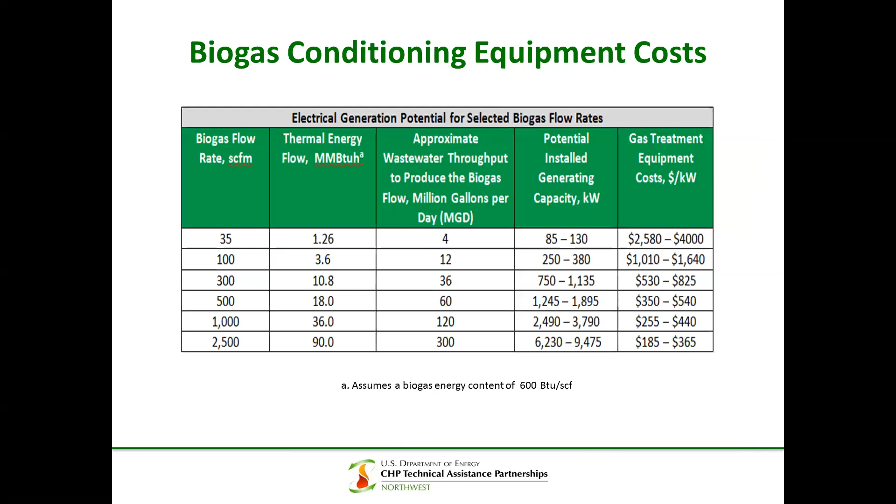So the conclusions from biogas conditioning: there's a considerable economy of scale, but it's also essential to ensure that the biogas is of acceptable quality for use in your prime mover. Conditioning systems are custom engineered with the removal efficiency based upon the inlet gas concentrations and equipment tolerances. Without proper gas conditioning, maintenance costs will increase dramatically, system efficiency will deteriorate, and you'll have increased downtime.

When you're doing a cost effectiveness analysis, you not only include the upfront cost of biogas conditioning, but also the maintenance cost of operating the gas compressor and changing out your filter media.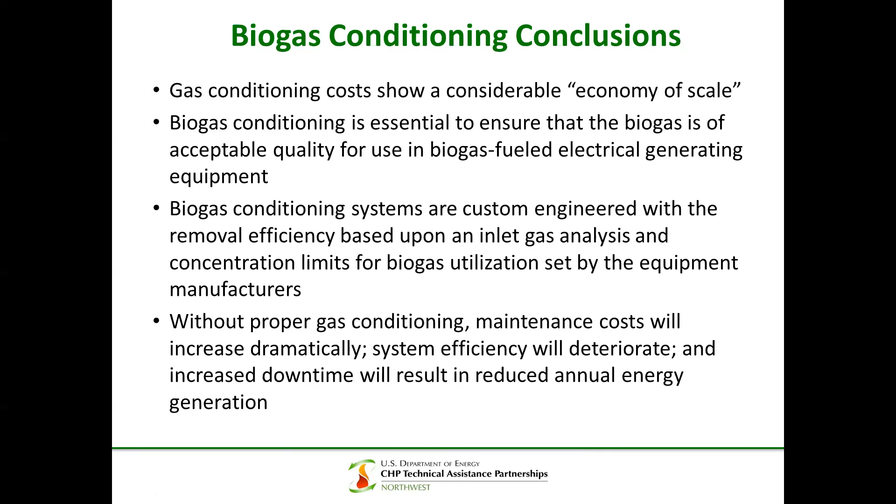Let's talk a bit about CHP plant operation at wastewater plants. In a typical industry, we might talk about electrical load following or thermal load following. In wastewater treatment plants, we talk about gas load following, biogas following. Basically, the electrical engine output is established by economically maximizing the combustion of biogas. So if your biogas production goes down, your engine output will also go down unless you have the ability to supplementally fire either on-site stored propane or have access to on-site natural gas.

Engine output changes as the biogas production varies, so sometimes you might want to consider biogas storage. I talked with one person at another CHP plant. Their utility had very strong time of day rates. The rate might be as much as 3 times more for energy purchase during peak period hours than during nighttime hours. So they were considering installing gas storage and then tripling the size of their prime mover to produce all of their energy during the period when it's valued the highest.

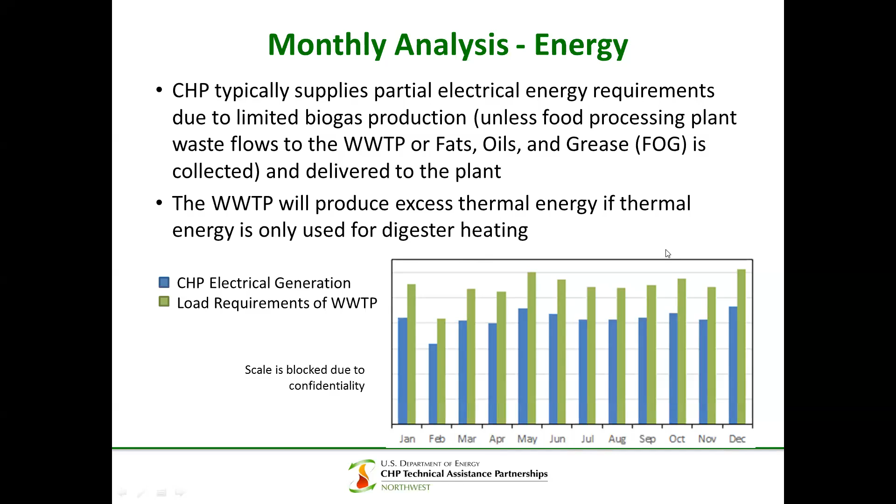Let's talk about FOG, or fats, oils, and grease potential. Generally, this material is collected from food service establishments and disposed of in landfills. So there's an industry out there of FOG haulers, just like there are of septic pumpers.

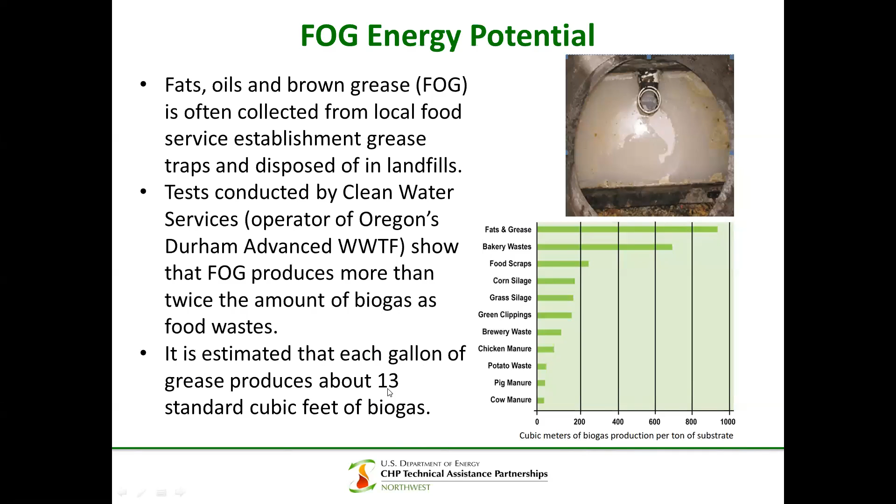Tests conducted by Clean Water Services, who operate the Durham Advanced Wastewater Treatment Facility in Oregon, show that FOG produces more than twice the amount of biogas as food waste. What they're showing here is the cubic meters of biogas produced per ton of product. Fats, oils, and grease are over 900. Food scraps are a little bit over 200. Bakery waste is a little bit higher. Brewery waste is lower. Chicken manure is far below FOG in terms of its biogas production potential. It's estimated that each gallon of grease produces about 13 standard cubic feet of biogas.

Co-digestion of FOG with sewage sludge can basically double your biogas production. What we're talking about here is a wastewater plant in these size ranges may be accepting 12,000 to 15,000 gallons of FOG per day. The availability of FOG results in the installation of increased electrical generation and the capture of economies of scale in biogas treatment and in your CHP project itself.

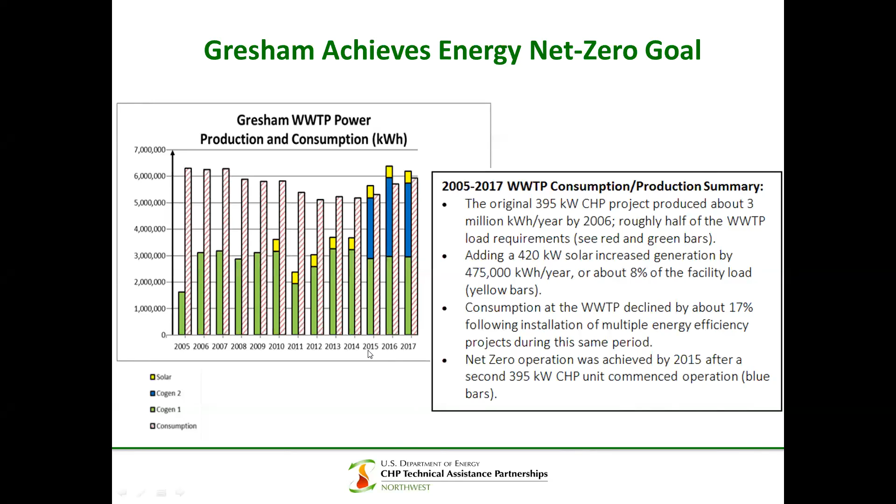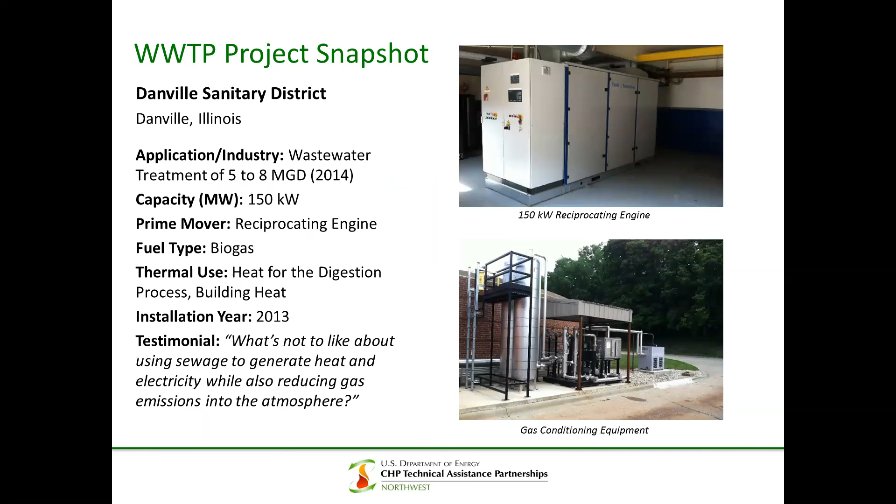A few project snapshots. This is a 150 kilowatt project at a wastewater treatment plant in Danville, Illinois. What I wanted to show you here is how the smaller equipment comes packaged in soundproof enclosures. Basically, DOE, the Department of Energy, is talking a lot about plug and play for small CHP projects. Some of these projects come in shipping containers, and you basically do the electrical hookup, electrical interconnection, hook up to your thermal loads, and the project is pretty much good to go.

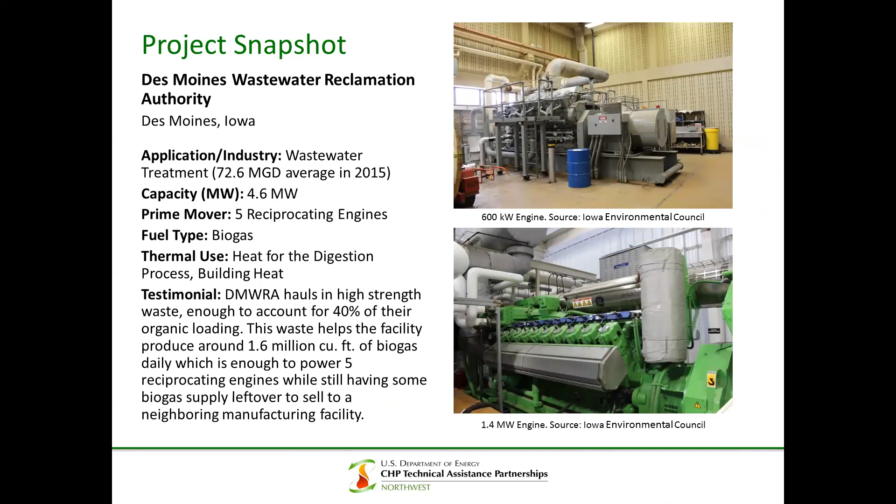Here's a plant in Des Moines, Iowa. They're treating 72 million gallons per day. They've got about 4.6 megawatts of capacity with 5 engines. Just like in the efficiency talk, multiple units enable the plant operators to follow biogas loads in an efficient manner. Also, one engine at a time can be brought down for maintenance so that the other 4 engines are still available to generate and meet plant loads, offsetting utility-imposed capacity charges.

How can the CHP TAP help you get a plant screened and help you down the development path if it's cost effective? First, give us a call. We'll ask you a series of screening questions, and we have software tools so we can take general information and

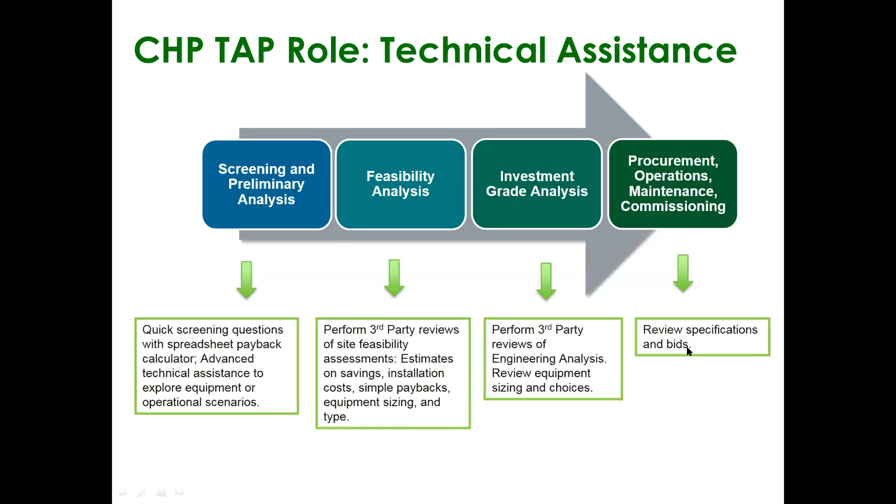do what we call a screening technical assistance analysis. We also perform third-party reviews of feasibility assessments. We used to do feasibility studies, but no longer. We do what we call advanced technical assistance, which can look at emissions aspects of a project design, economics, and greenhouse gas reductions, as well as emissions after-treatment requirements. We can also perform third-party reviews of engineering analyses done by others, review specs and bids, and basically give an unbiased opinion to the plant developer.

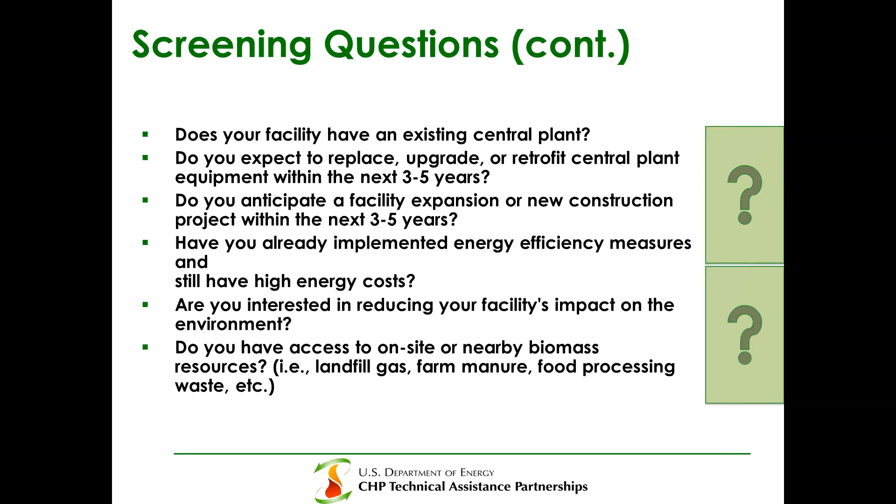Then we ask if you have an existing central plant. Do you expect a facility upgrade in the near future? Have you already installed energy efficiency measures? Are you interested in reducing your impact on the environment? Do you have access to additional biomass resources? All of these are factors that go into a plant design.

Early questions for wastewater plants: Can you provide one year's worth of electrical and thermal energy consumption? Have you measured, and can you provide, biogas flows if your plant already has an anaerobic digester? And lastly, we ask if you've done an analysis or assay of your biogas. We want to know what your energy content is, as well as the concentration of contaminants.

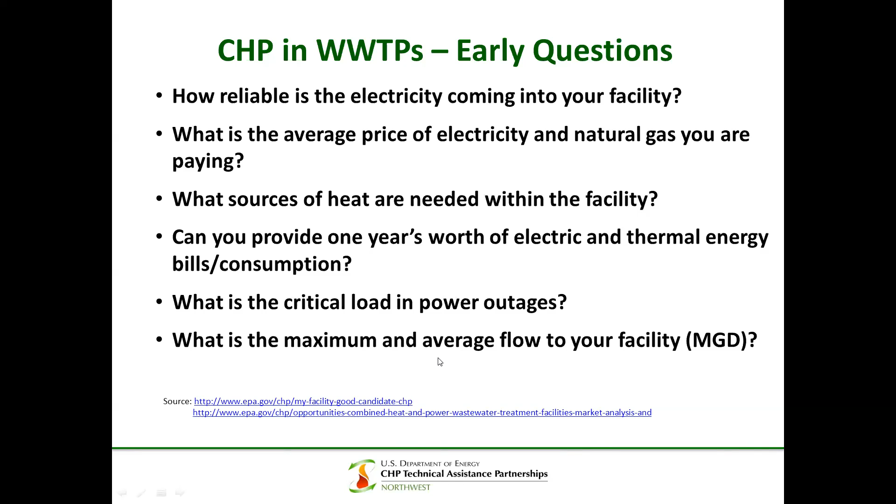And of course, we ask what the maximum and average flows are to your facility. Ideally, we like to look at that by month. So are you producing biogas? How much? Does the amount change seasonally? How is it currently being used? Is it for flaring, burning in boilers, or partly for digester heating? What additional revenue streams might result from a biogas CHP system?

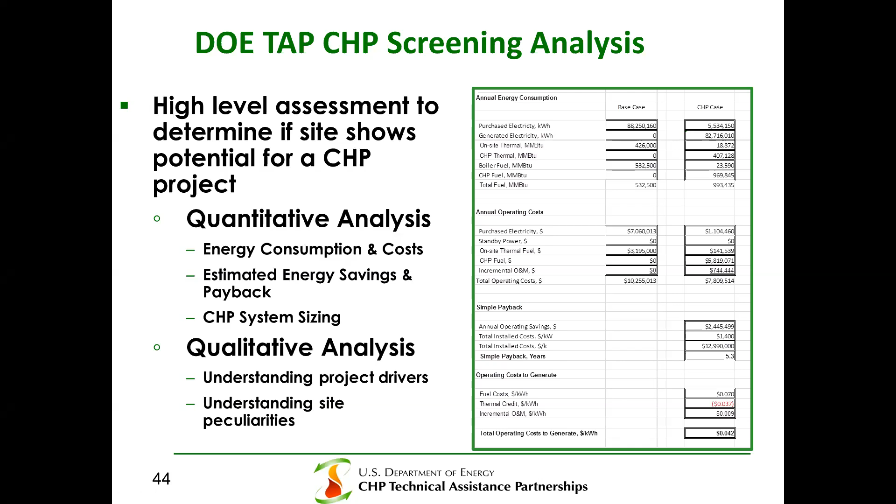Advanced technical assistance, again, can deal with emissions, electrical load profiling, thermal profiling, and installation cost estimates. We can talk about the trade-offs between using one type of equipment versus another. Prime mover selection depends on whether you have a need at your site for steam versus hot water. And of course, a lot of times we get involved with financial calculations, one example being estimating levelized generating cost from, say, a back pressure turbine project at an industrial site.

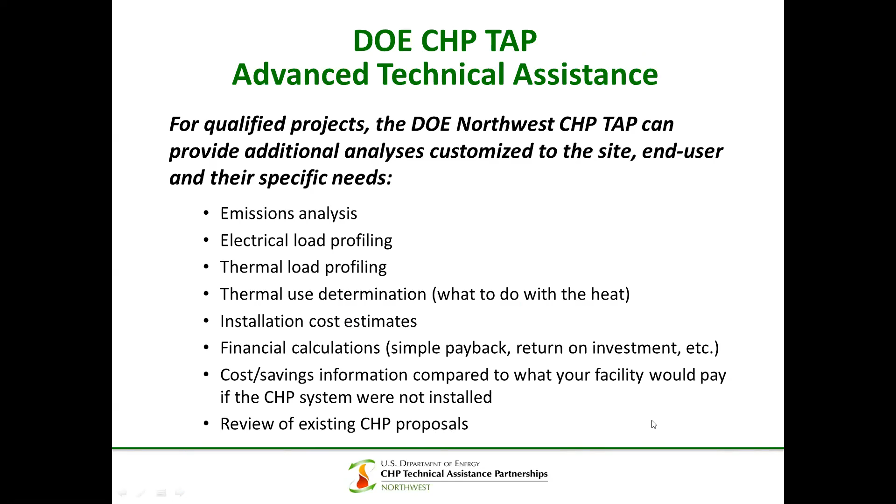We'll help you review existing CHP proposals if you get to that stage of development. Technical challenges include biogas cleanup equipment, space constraints, staff education, training, and engine certification for the prime mover that's selected. CHP operators at wastewater plants can elect to contract out for maintenance, have in-house staff do it, or maybe contract out for a few years to allow their staff to become totally familiar with the equipment and maintenance requirements.

Definitely contact a utility early on to find out what their interconnection requirements and standards are. Look at maybe power sales of excess electricity to the utility. Look at whether or not they offer net metering, and look at the value of renewable energy credits. They could be transferred to the utility, and of course the prices for renewable energy credits is constantly changing.

Permitting issues: definitely talk to your local air quality control folks early on. Generally, we've found that small projects don't need after-treatment—you're not going to be a major source emitting over 50 or 100 tons per year of a criteria pollutant. But again, contact them as soon as you know what your prime mover emission rates are, and notice that some engine manufacturers offer standard and low-emitting types of equipment from a NOx standpoint. Look at the possibility of increasing your biogas supply due to FOG or food processing plant waste.

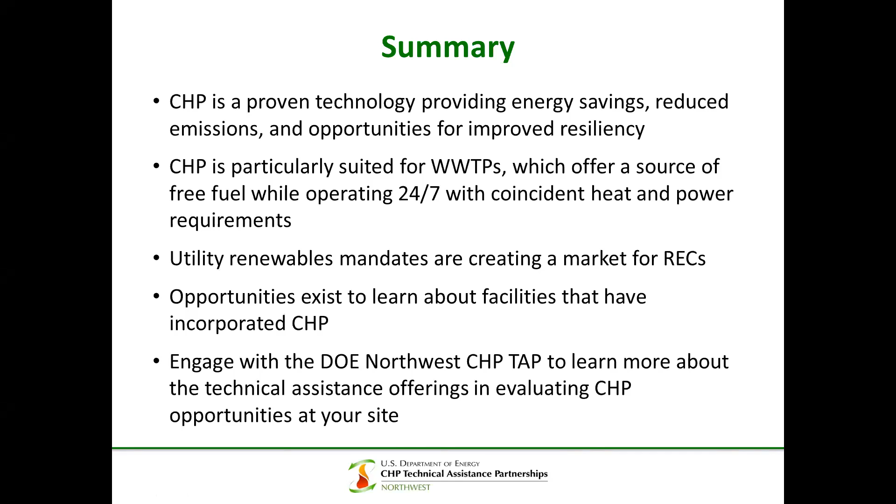Engage with the Northwest CHP TAP. Pick our brains, let's talk about your project. We offer free screening and technical assistance, and let you know what your simple payback might be. We roughly calculate the appropriate equipment size and then indicate if you have strong, marginal, or moderate potential for a CHP project. Basically, get started by contacting the Northwest CHP TAP. Here's our contact information, and with that, I'm open for questions.

Boy, I love questions like that, because the answer is easy: it depends. And that's what the screening technical assistance study is all about. We can determine your cost of production, and to create benefits on site, the cost of production always has to be less than the cost of utility provided power. Now I'll give you a great example.

We looked at a digester that would be operating on food processing plant wastes in the Tri-Cities area of Washington State. The utility rate was less than or about 4 cents per kilowatt hour. And even with free fuel and no siloxanes available in the food processing plant wastes, we came up with a simple payback of about 6 years. So the project was good, but from an industrial standpoint, they like to see a 2 or 3 year simple payback. So we're waiting on that project until the time is right, or until the value of renewable energy credits goes up.